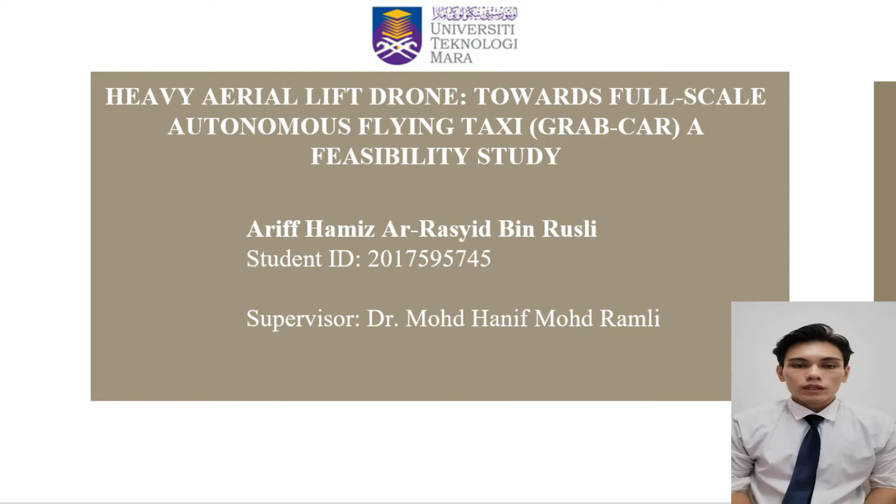I would like to present to you my final year project 1 proposal with title Heavy Aerial Lift Drone Towards Full-Scale Autonomous Flying Taxi Grab Car, a feasibility study. My supervisor is Dr. Mohd Hanif Mohd Ramli.

For the content of this project presentation, it includes introduction, problem statement, objective, literature review, methodology, expected result, and lastly conclusion. Okay, for the first part, introduction.

Drone is a flying object or machine that is remotely controlled by humans. In other words, it is called UAV, Unmanned Aerial Vehicle. It could be equipped with many types and kinds of technologies, depending on user preference.

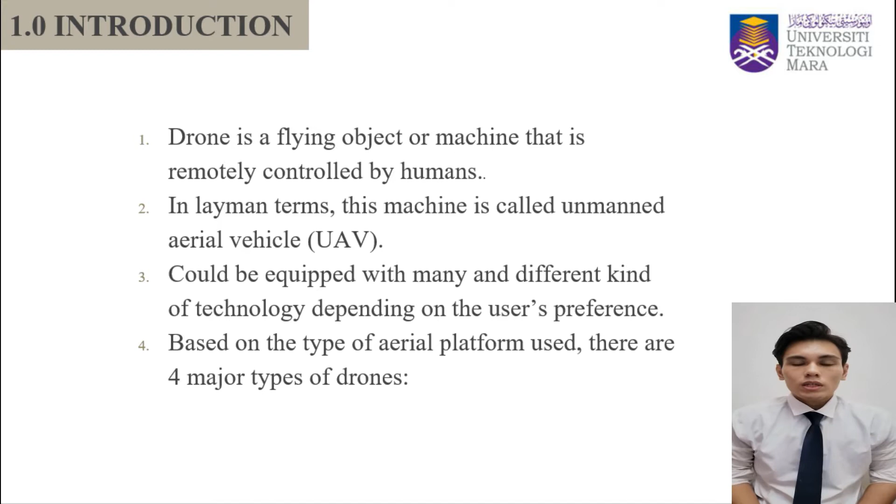Based on aerial type platform base, there are 4 types of drone: multi-rotor, fixed wing, single rotor, and hybrid VTOL, vertical takeoff landing.

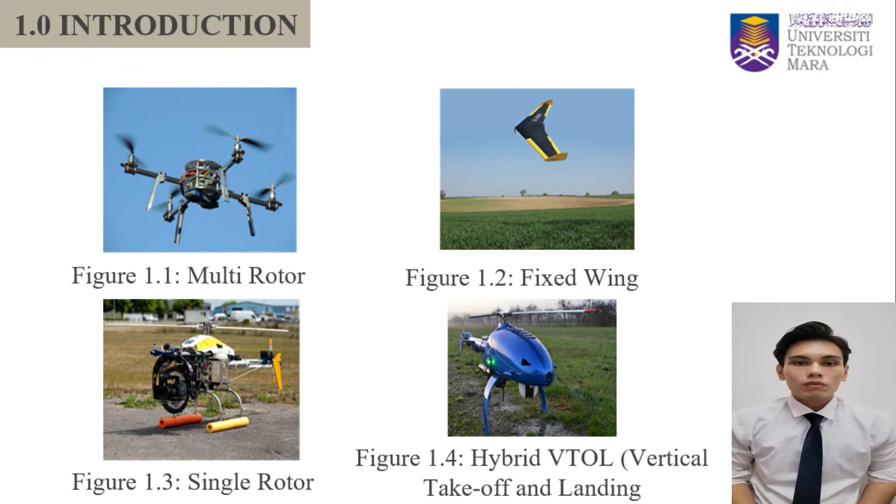For the problem statement of this project: to prepare a conceptual 3D design model of a passenger drone. The design of the passenger drone must be large enough to fit one person at a time with fully autonomous capability.

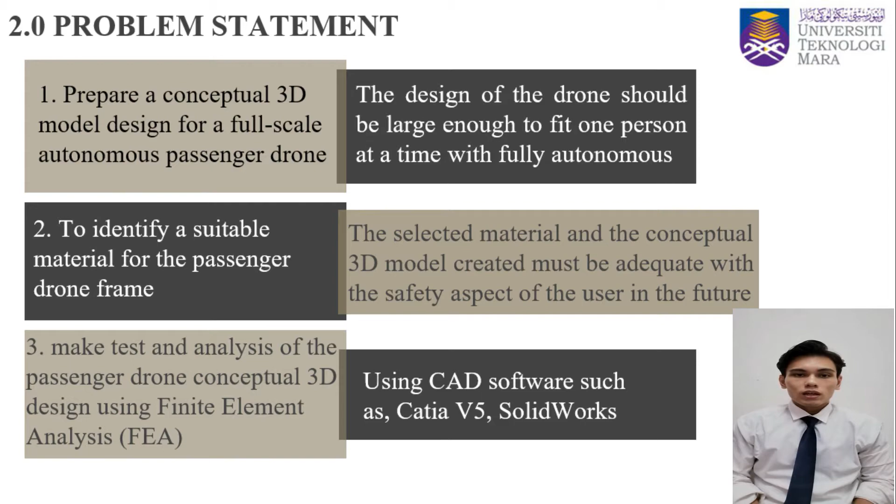Next is to identify a suitable material for the drone frame. The selected material must be adequate with the safety aspect of the user in the future. Last is to make test analysis using FEA, finite element analysis, of the drone design frame, using CAD software such as SolidWorks or CATIA V5.

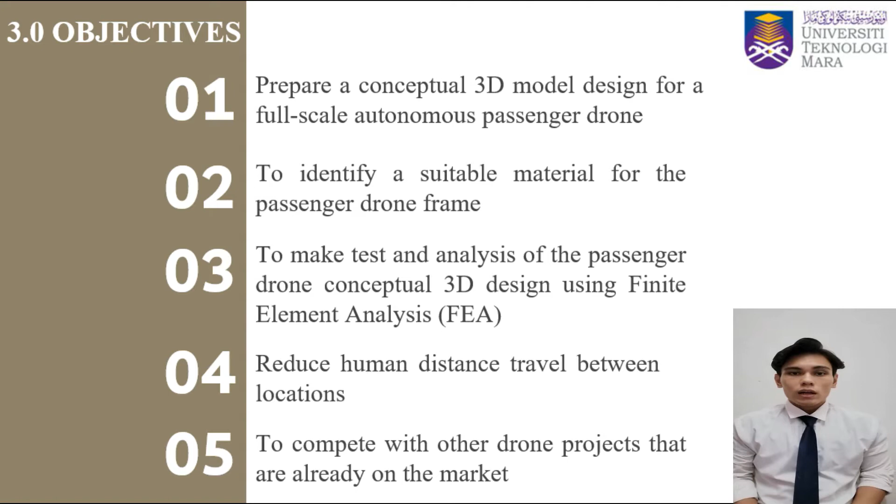The objectives of this project are to prepare a conceptual design of the drone, to identify a suitable material for the frame, to make test analysis using finite element analysis (FEA), to reduce human travel distance between locations, and lastly to compete with other drone projects already out in the market, especially in Malaysia.

As you can see in figure 4.1, these are the possible drone frame constructions. For this project, after making some research, I decided to choose Quad X.

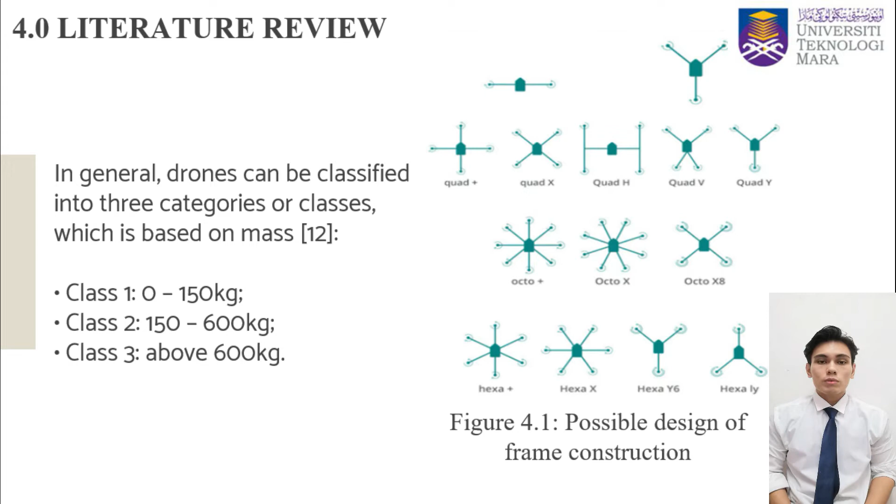Drones can be categorized into 3 different classes: 0 to 150 kg, 150 to 600 kg, and above 600 kg. For this project, we'll be focused on class 2, 150 to 600 kg.

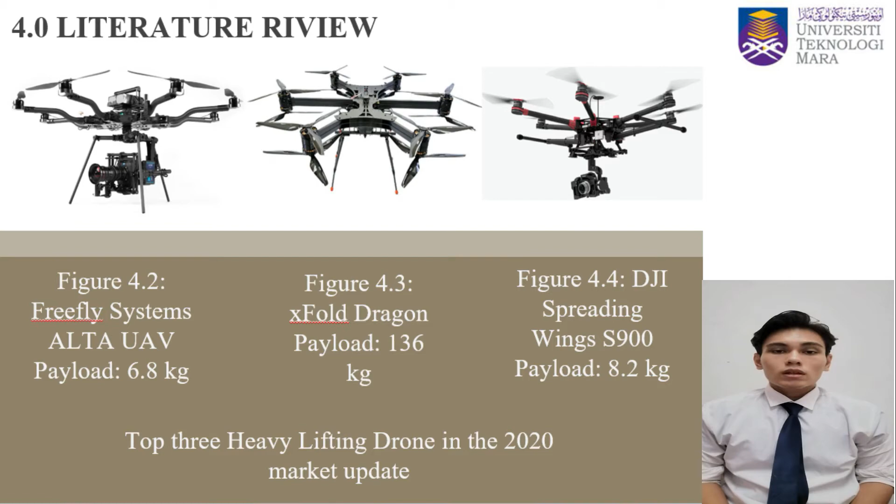This is the latest update for the top 3 heavy lifting drones in 2020. The first one, Freefly Systems Alta UAV, has a payload up to 6.8 kg. The second one, xFold Dragon, has a payload up to 136 kg. The last one is DJI Spreading Wing S900, with a payload up to 8.2 kg.

Based on the top 3 heavy lifting drones in 2020, they are good and equipped with high technology, but they are not good enough for this project, because this project will focus on lifting a human from one location to another. So another example of passenger drone already out in the market is Volocopter.

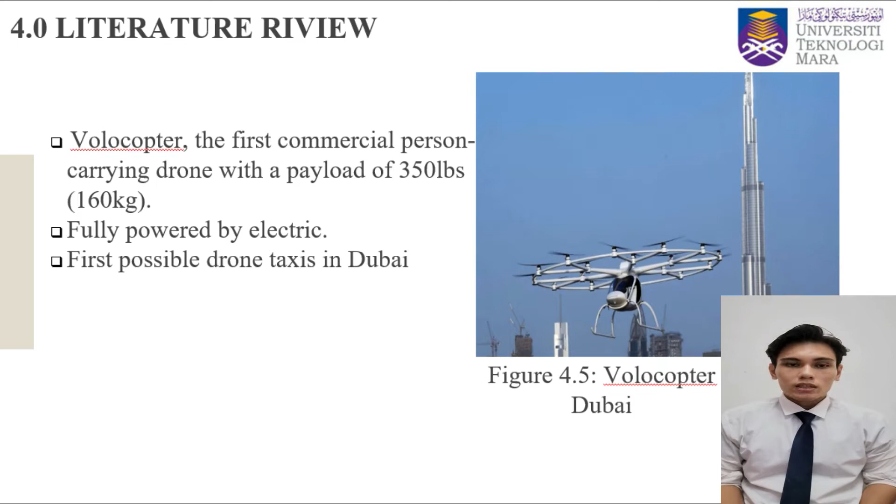Volocopter is the first commercialized passenger drone in Dubai. The payload can be up to 160 kg. It is fully powered by electric, and it is the first possible drone taxi in Dubai.

From the literature review study that I have made, you can conclude that multi-propeller drone configuration offers the best performance, optimal stability, and thrust. So this project will focus on designing a drone with a multi-propeller base.

The frame design of the drone plays a major role in this project, playing a major role in completing it. It must be light enough to allow the drone to fly smoothly.

The design must be highly flexible and suitable for a wide range of applications. Multirotor frame design is chosen because it is much easier and can withstand heavy load, strong and uneven loading conditions.

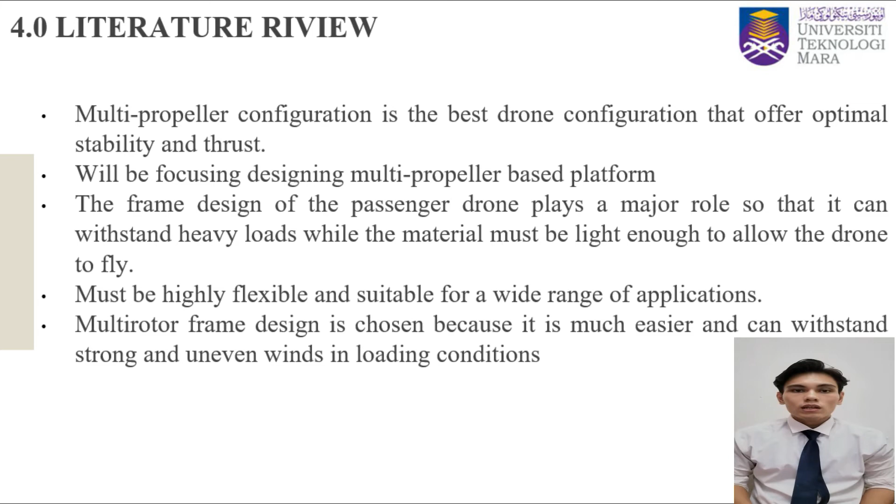Next is methodology. For this part, I've prepared a flowchart of the initial design process of the passenger drone flying taxi. Based on the flowchart, firstly, I have to identify the passenger drone design requirements.

Next, I will proceed to the initial concept and design, probably through sketching. Then, using CAD software, I should develop a conceptual 3D model. After that, I should discuss with my supervisor to confirm the body frame structure design. Lastly, to make test analysis using FEA to predict behavior under required conditions.

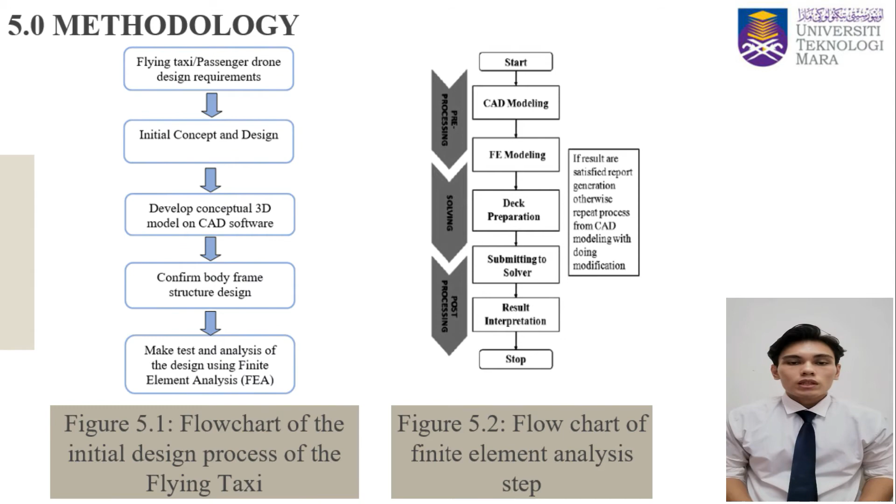In figure 5.2 is the step on how to conduct a finite element analysis, FEA. There are 3 stages: pre-processing, solving, and post-processing. In the first stage we focus on CAD modeling and FE modeling. In the second stage we focus on deck preparation. In the final stage we focus on submitting to solver and result interpretation.

Figure 3.4 shows a simulation on a piston rod. The difference in color shows the variable values that help predict the mechanical behavior. The most stressed part, as you can see, is the red color. As long as the value of the stress is within the safety range of the drone, it is acceptable.

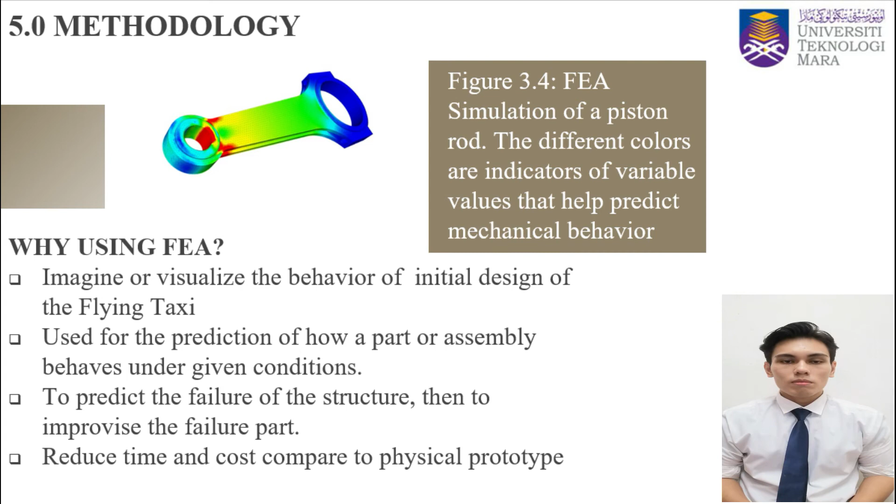Why am I using FEA? Because it helps to imagine or visualize the behavior of the design I made for the passenger drone taxi, to predict how a part or assembly behaves under given conditions, to predict failure of the parts or assembly, and lastly to reduce time and cost compared to an actual physical prototype.

For the expected result, we can expect that this project's passenger drone will be a class 2, 150 to 600 kg drone. It will be fully autonomous, using renewable energy as its energy source, and can carry a person from one location to another without ignoring safety aspects, predicting the failure of the structure using FEA.

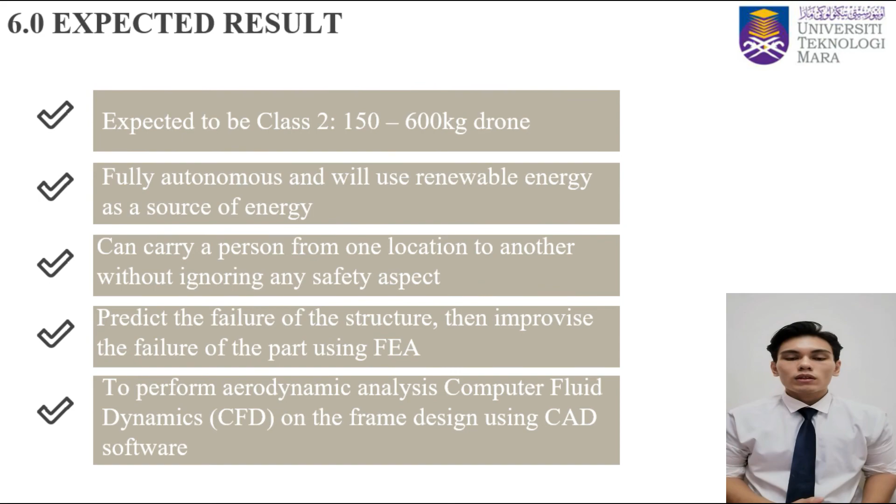For future studies, only if this scope of study condition has been met, to perform aerodynamic analysis, computer fluid dynamics (CFD), on the frame design using CAD software such as SolidWorks.

In conclusion, this project shows that drones are capable of lifting heavy objects such as humans. Material for the body must be chosen wisely, and it must be light enough without holding too much weight for the drone to fly smoothly.

Structure design will be run through FEA to study the structure deeply. The design must be user-friendly in terms of ergonomics. Lastly, I would run a CFD analysis, computer fluid dynamics, on the assembly design of the passenger drone.